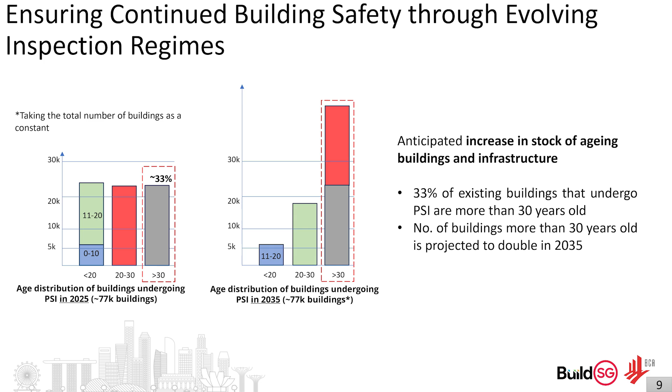I'm the first speaker and I will be sharing on how we are future-proofing our buildings and infrastructure in Singapore. So let us first start with some data on our existing building stock. As you can see, currently about 33% of the buildings that undergo PSI are actually more than 30 years old. And in 10 years, this number is expected to double. So why is this of significance to us?

Well, just like our human bodies, as we get older, we actually need to go for more regular checkups to make sure that we are still healthy, to make sure that nothing is wrong with us. This is the same for buildings. You need to regularly inspect them, maintain them, and keep them safe. So what happens if we don't do it? This is what happens. Catastrophic events that result in the loss of lives.

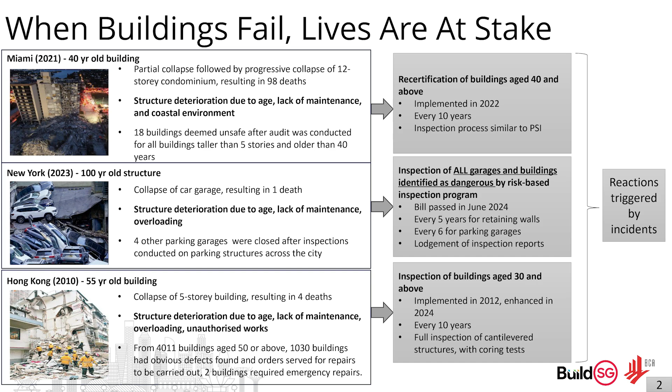So here are 3 incidents that occurred overseas where the buildings actually collapsed. And a similar theme is that this is a result of structural deterioration due to age and lack of maintenance. So after these events, they actually implemented certain inspection regimes to ensure that there is no repeat. And in Singapore, we actually have something that is very similar. In fact, we have 2 regimes. We have the periodic structural inspection regime and the periodic facade inspection regime.

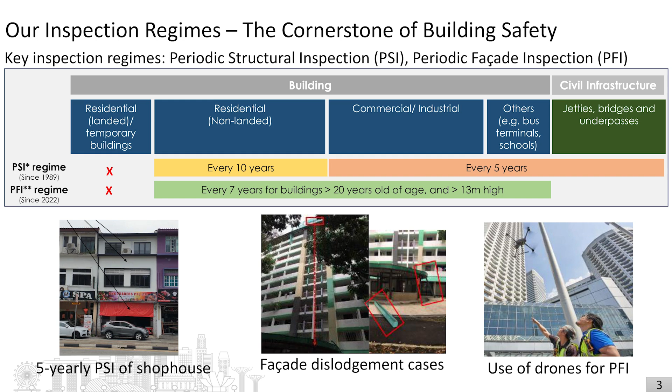The PSI was implemented in 1989, and all buildings except landed residential buildings have to be inspected, whether every 10 years or 5 years, depending on whether it's residential or non-residential. What about buildings which are for mixed use, such as the shophouse shown? Well, for this case, it's a 5-yearly PSI, the reason being that the first floor is used for commercial use.

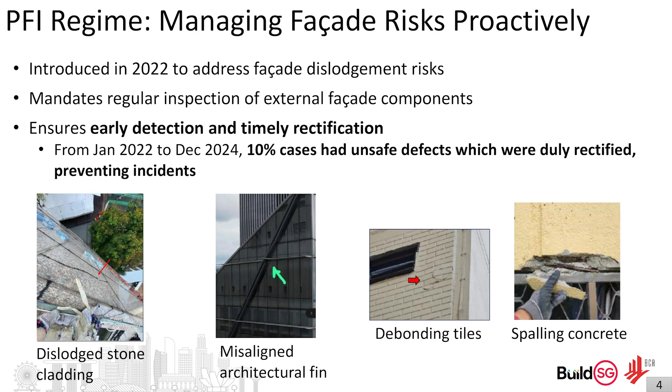In 2022, we introduced the PFI to actually address the facade dislodgement risk. This mandates the regular inspection of our external facade components, and since its implementation in January 2022 till December 2024, out of the cases that we have received, 10% of them had unsafe defects which were actually rectified timely and incidents were prevented. As you can see on the screen, these are some of the defects that were actually rectified.

So moving on, for PSI, which many of us are familiar with, this was actually implemented in 1989, but over the years, we have enhanced it. In 2022, we expanded the inspection checklist to include the inspection for vulnerable building elements that we actually learned from our past cases. This also provides guidance on inspection of new structural materials and configurations. And in 2023, we introduced the differentiated PSI, and just last year, in 2024, the civil engineering infrastructures, such as our jetties and bridges, are now under our PSI regime.

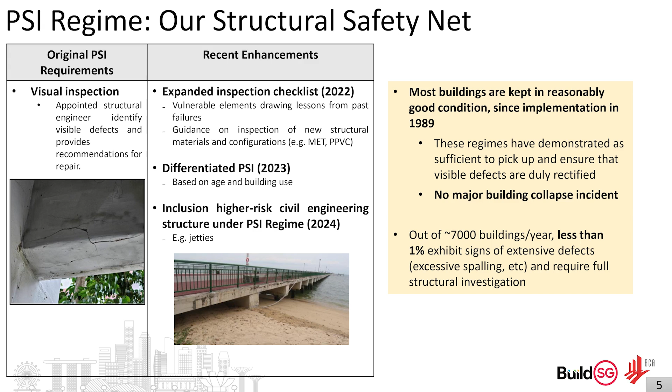So what insight have we got through the PSI? Through this PSI, we actually realized that buildings in Singapore are safe, and most buildings are kept in reasonably good condition. About 7,000 buildings are inspected each year, and 1% of them actually show that there are significant defects which require further investigation, but only this 1%. So what do we mean by extensive defects?

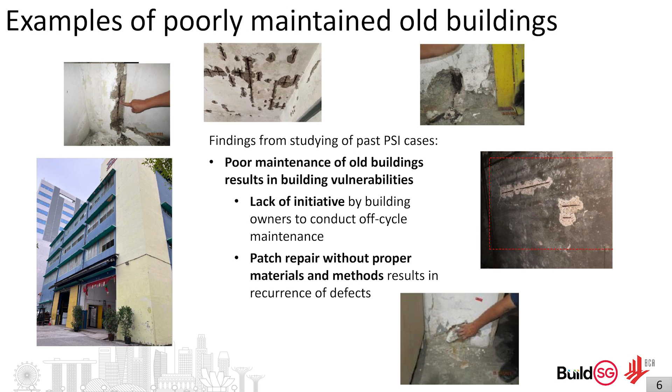From studying these past PSI cases, these defects are actually a result of poor maintenance of old buildings. This poor maintenance results in building vulnerabilities, the reason being that owners do not take the initiative to conduct their off-cycle maintenance, whether to inspect them and to get the defects repaired. They rely only on the PSI. And what happens? When defects are identified, they use improper materials and methods of repair, and this results in the reoccurrence of defects. So what can we do and what should we be doing?

We should be taking the initiative to detect defects early so that we can preemptively intervene. This allows us to repair them before they deteriorate to a state where repair is very expensive. And of course, building owners have a part to play in all of this. You have to be more proactive when it comes to building maintenance.

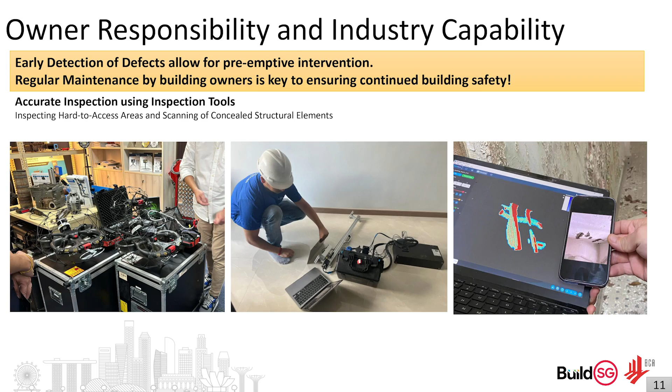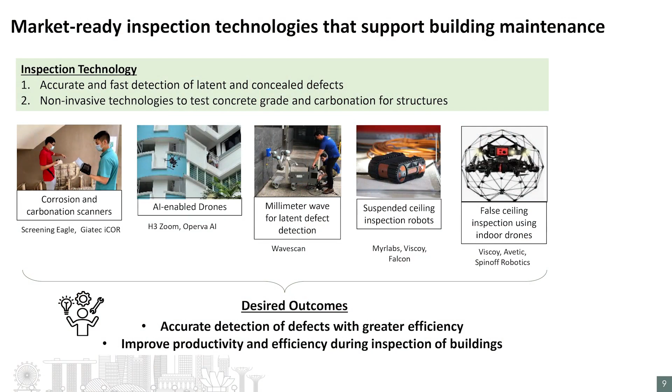Today, we actually have tools to help us to detect defects early. We have drones to help to assess hard-to-access places, and we have scanning technology to inspect structural elements which are concealed. In the market today, we have many tools, and today we have 6 vendors who will be demonstrating what we have. And of course, tools are only just tools. Their value is only realized when building owners actually use them. So building owners have a key role to play when it comes to keeping our existing buildings safe, and we actually advocate for that.

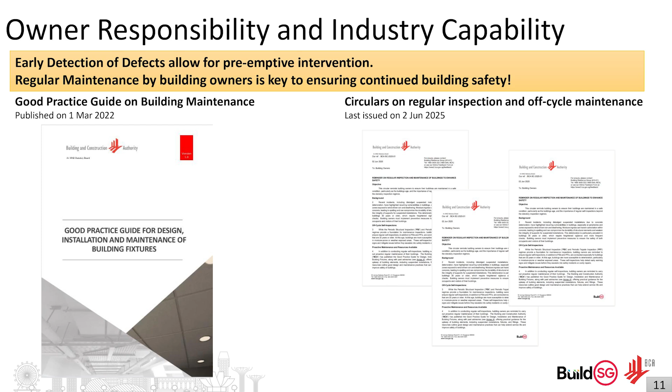In 2022, we published this good practice guide on building maintenance. We hope that building owners can adopt these good practices into their building maintenance regime. And of course, we also constantly remind the industry that you need to regularly maintain your buildings. This is done through our circulars, the latest of which was just issued in June last month.

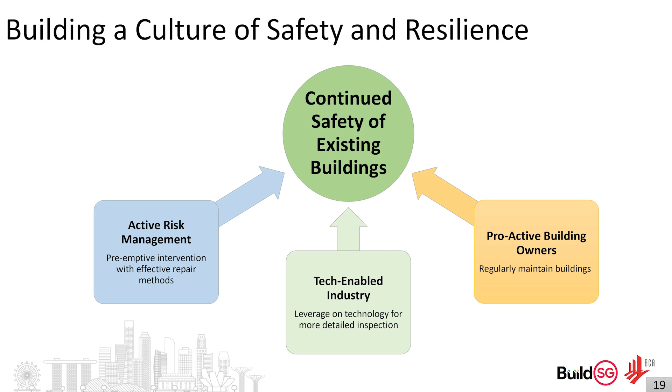All in all, to keep our existing buildings safe, we need to take on a proactive approach. We need to actively manage this risk through preemptive intervention with effective repair methods. We have to leverage on technology so that we can be more effective in what we do. And of course, building owners, you have a key role to play here. You need to be proactive when it comes to building maintenance and do it regularly.